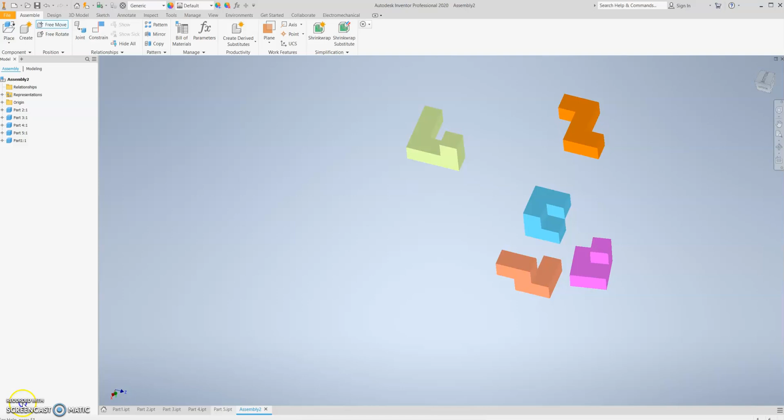So the next step that we'll do is creating an assembly drawing to bring all of our pieces together and ultimately assemble them into the cube. So I'm going to get rid of this and we will start over from scratch.

So after you've modeled all your parts and done the dimension drawings of them, the ortho-iso drawings of them, we're going to create an assembly, and what the assembly is going to do is give us a space where all these pieces can be put together. And we're going to do that by going File, New, Assembly, Standard IAM.

And in this nothing space, we're going to put all of our pieces. So we're going to, on the upper left, hit Place. You need to know where your thing is saved.

After I've finished all my models, and you've done your dimension drawings, the next thing we're going to do is assemble them in the 3D space, which is a bit of a challenge for a couple of reasons. One, you have to know how it goes together, but also we have to get used to manipulating the pieces within the 3D space. So I'm going to go through that in this video.

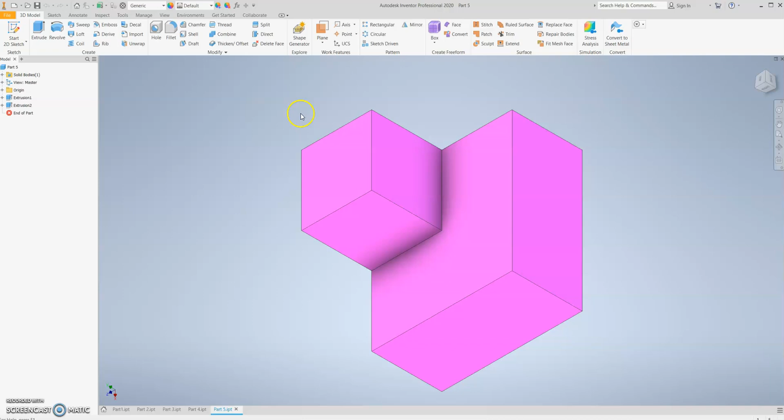So I'm going to make a new document, and it's going to be a standard IAM. I can double click on it to open this. So to bring in our pieces, I have them all open here because I was just modeling them, but if you don't have them open, that's fine. You're going to select Place, and then you have to be able to find them within your file browser, so make sure you know where you save it.

You can bring them in one by one, or you can click on the first one, hold down Shift, and then click on the last one. That'll just select the whole list. I'll say Open. Now right now it's just floating freely in 3D space. If I scroll with the wheel, it's going to move me in and out.

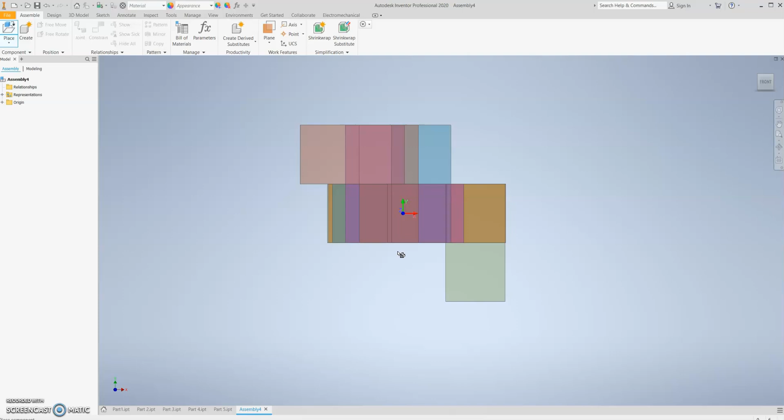But I'm just going to click once, and it's going to place them all at the same time, all together. But it's going to also let me keep placing them, and I don't want multiples of these pieces, so I only clicked once, and now I'm going to hit Escape because I'm done placing pieces.

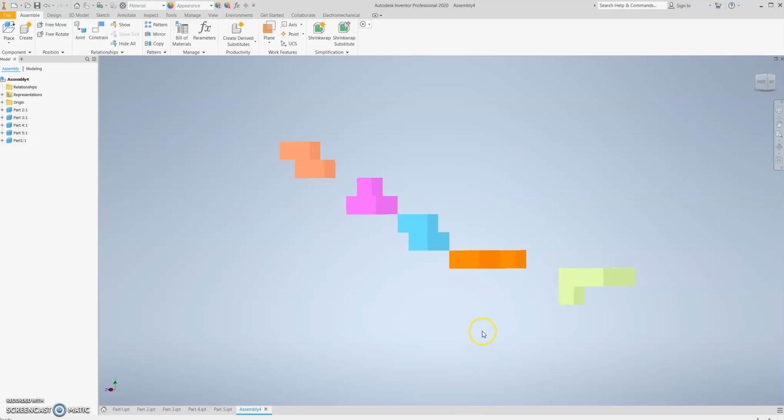So now I've got these pieces sitting in 3D space, and the important thing to notice is we are moving in 3 dimensions here. So if I'm looking at them from the top and I move a part, you may be moving it away from it on this axis, but there's also a risk that you're going to move it an unknown distance on the axis that is perpendicular to you. So just be careful when you're moving pieces around that what you think is moving it just to the right maybe is actually moving it back really far, so you might have a harder time seeing your pieces.

At any point while you're manipulating the pieces, if you lose track of where everything went, I was just scrolling with the wheel, wild and crazy like, you can click on the navigation cube, and I just click on the corner. It'll recenter me to all the pieces. Now if a piece is really far away from the others, this causes a problem because it's going to show me everything at the same time, which is going to include a lot of space, so everything's going to be really small.

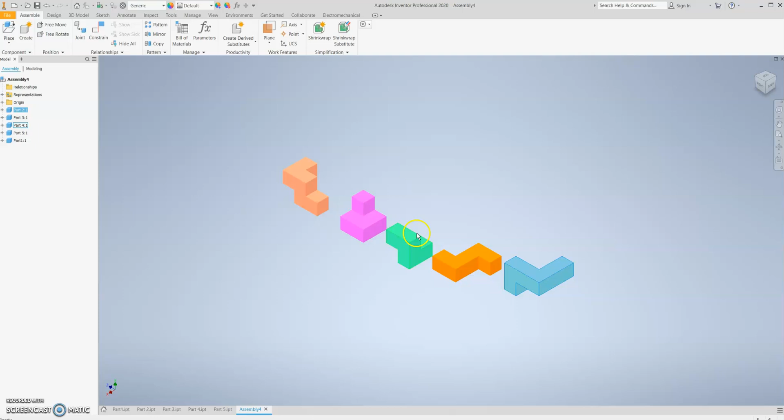So as I want to bring these pieces together, I need to know what is connected to what. So I have a picture from the student's drawing that I borrowed to create these files. So I've colored them as best I could the same so I can tell how these things go together. So using my drawing, I can see maybe this green piece connects to this pink piece.

So this green piece has sort of an L shape to it. Where's the green piece? There's the green piece. So the L piece in there, in this space that I'm kind of looking at here, this pink space kind of gets inserted against.

Now, when we create what's going to be called constraints or limitations or locks, as the pieces go together, we need to think of it as either these two surfaces are in contact or these two surfaces are even. I'll show what I mean by that in a moment.

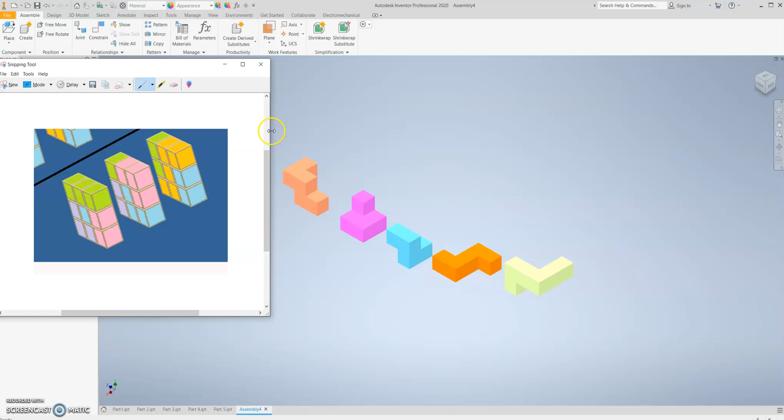So now on the pink piece, I'm going to identify what part sits in this L shape, what part is actually butted up against here. So we've got sort of this Z shape, and then there's the one that comes off of it. So that's this piece. Let me look at that piece here.

If you need to rotate a piece around, you can click on it, hit free rotate, and that'll let you kind of orbit it a little bit.

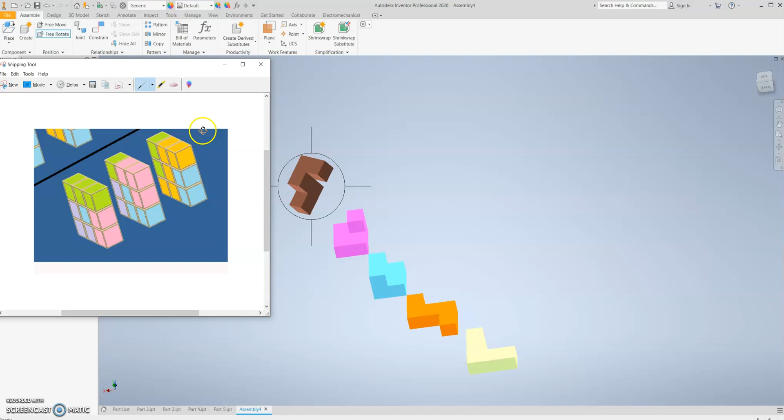So that piece has, let me see, the part that's touching the cube is these two here, which I'm trying to figure out which it is. I've got these three connected and these two that stick out. So I think that's these three here and then those two that stick out. And so what I'm going to do is, that's going to go into that L bracket there.

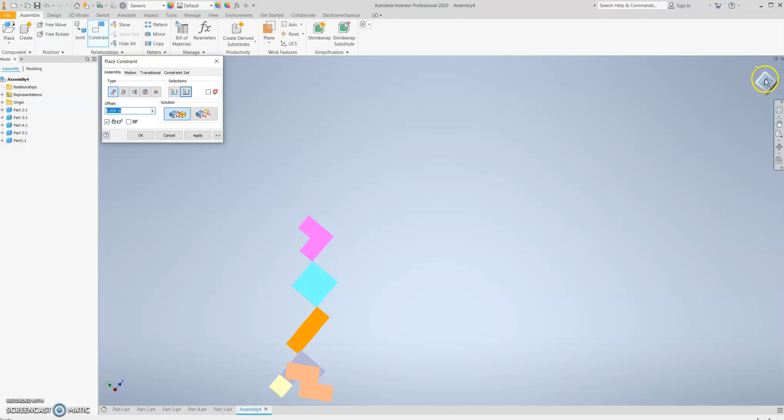I'm going to hit constraint, and I want that surface to be placed in contact with that surface. The first one you click is the part that's going to move. So that put those two surfaces against each other.

I'm just clicking on the wheel and scrolling to navigate around here. So that looks good, that looks like what I want, and I can say apply. But this is one thing you will change. So this is mate, as in these two surfaces are touching. I'm going to say apply on that one.

But if I want two surfaces to be even, because maybe it's easier to get to them, I can select that as well. So this one's going to be a different constraint because I want maybe this surface to be even with that surface, but I want this pink one to move. So actually I'm going to hit cancel and I'll go into it again.

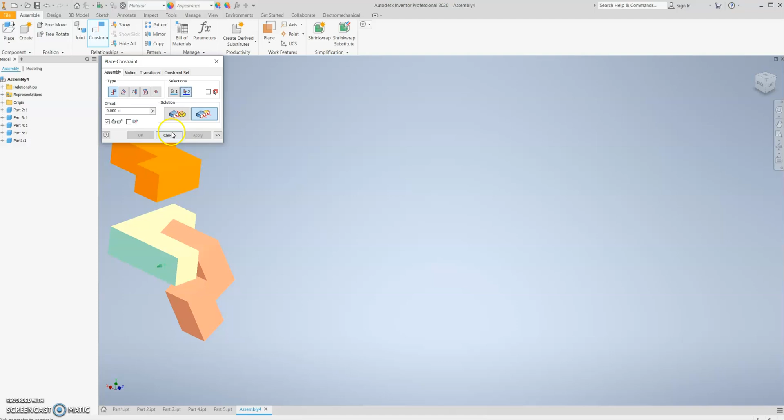So I'm going to constrain. I want this piece to move to that piece, but I want them flush or even with each other. So that'll move it up that way. And I can say apply.

Now I've only constrained it twice, so it's going to let me move it only the way that I haven't constrained it. And that's going to be how you're going to make sure everything is locked. If you go to move stuff and it moves like this, you're not fully done.

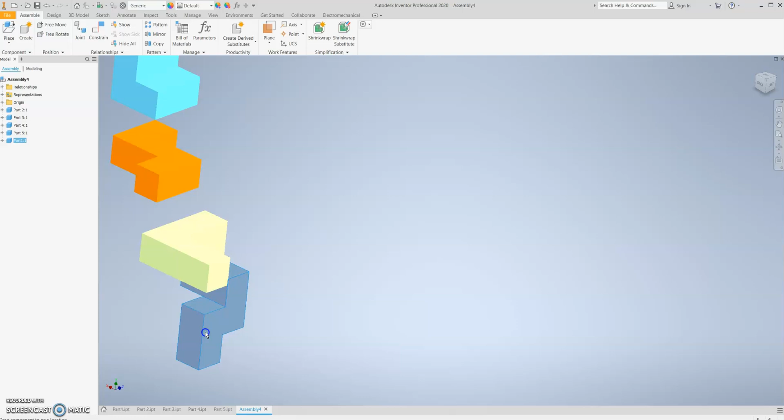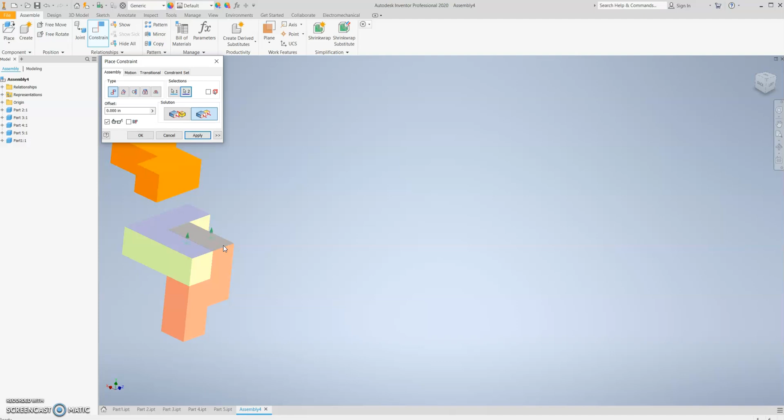So the last thing I can do is this top here, where I can constrain and say this surface and this surface, I want flush with each other. So that's going to make them even. If it's a constraint that it can't do because maybe there's an argument between two rules that you gave it, it'll make sure to tell you about that. So I'm going to say OK.

If there's a constraint or a rule that you put together and you realize that maybe it was wrong, so maybe that piece was not in the orientation that you intended and you had to go back and change it, if I click on the part and go to the plus sign next to it, I can see all the constraints and it'll show me which two surfaces are constrained and how they're constrained.

If you right click and go to edit, that'll let you change it. Or more likely what you're going to want to do if something is wrong is just right click and delete it, because then that'll let you move in that dimension again if, for example, you constrained it the wrong way.

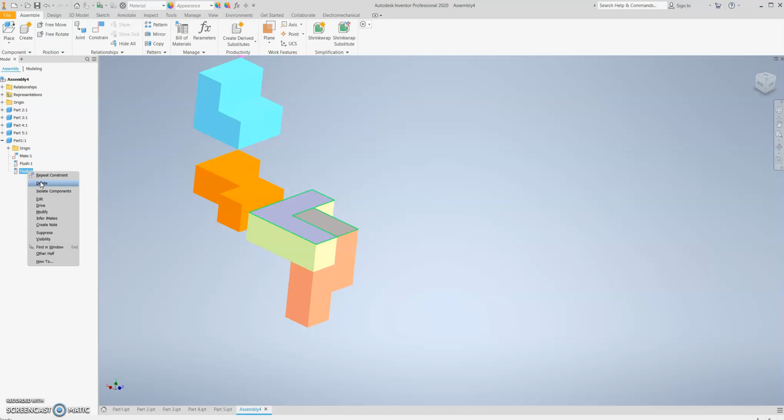And then you're going to go through the rest of the puzzle, putting them together, and if you can shake the whole thing and nothing falls out from any of the pieces that you grab, then at that point you will be all fully assembled. That does take a little bit of time, and I'm not going to make a whole video doing that, but ultimately that's what you're going to do to complete the assembly of your cube.